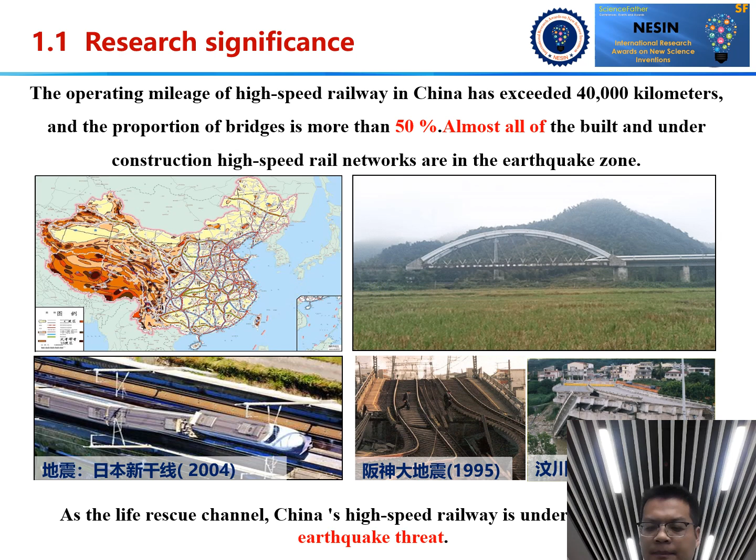Research needed: last year in China, many earthquakes happened, for example Qinghai, Menyuan, Sichuan, Luding, and so on.

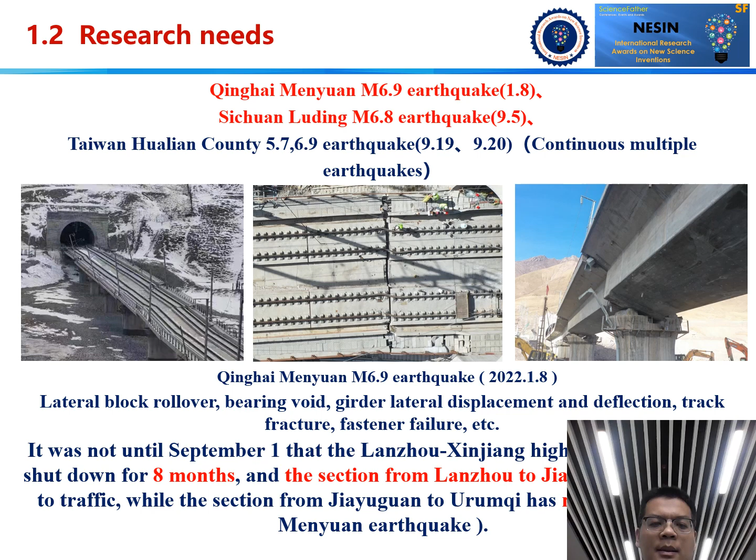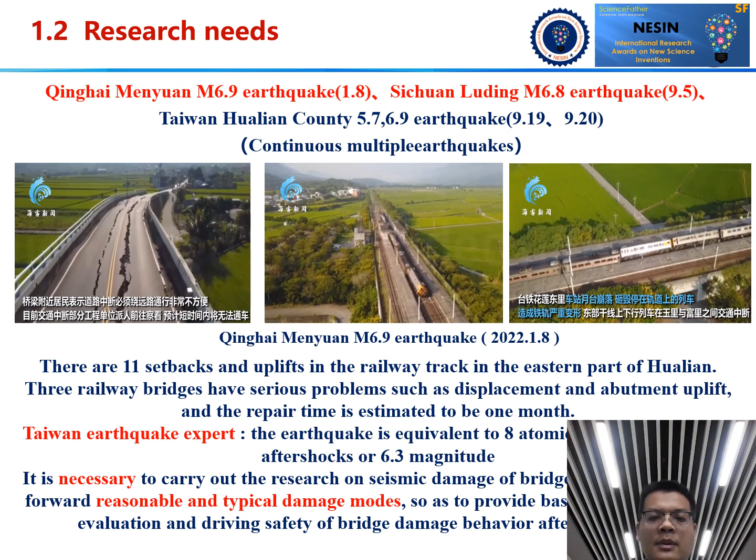These three pictures show the bridge, the track or rail, or the tunnel. Both of these key members on the high-speed railway line are damaged under the earthquake. This picture also shows the earthquake damage.

Scientific problem: from the earthquake damage shown in the PPT, you can see there are some scientific problems to calculate or solve. The first one is the mapping relationship between the damage degree of key components and track irregularity under earthquake.

It is the link between the degree of seismic-induced damage of the track-bridge system and the safety of driving on the bridge. So we can think about how to reveal the damage mechanism and energy dissipation mechanism of key components.

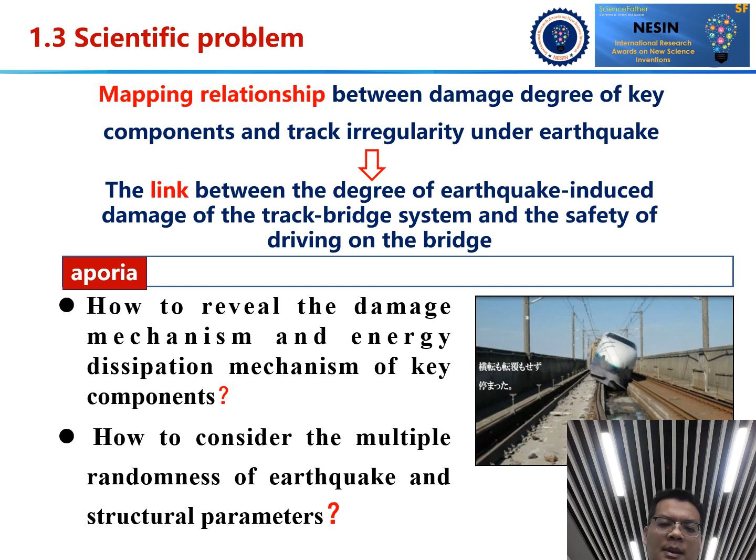We can see the bearing, the pier, the track, the fastener, the CA mortar. All of these components we can call the key components in the high-speed railway system. Next, how to consider the multiple randomness of earthquakes and structural parameters.

Next is the corresponding relationship between traffic safety on the bridge of the track bridge system and the seismic damage limit of the components. This covers seismic design of components of the track bridge system, how to determine the limit state of driving safety on bridges after earthquake damage, and how to evaluate the applicability of driving on bridges with earthquake damage. This lays a foundation for research and development of seismic design and isolation technology based on driving safety.

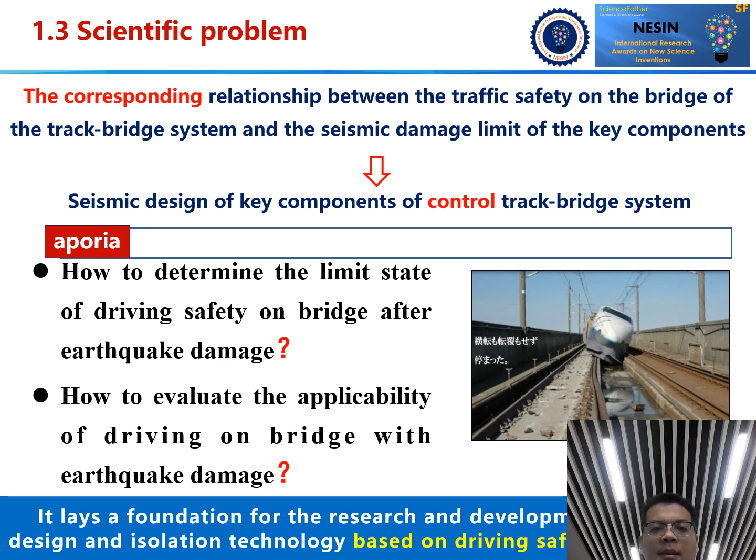Now let's look at the types of ballastless track slabs. In China we use three types of track slabs. We call type 2 the longitudinal track slab, and types 1 and 3 are unit track slabs, meaning they are composed of unit track slab sections. The length of one unit track slab is 5.6 to 6.5 meters.

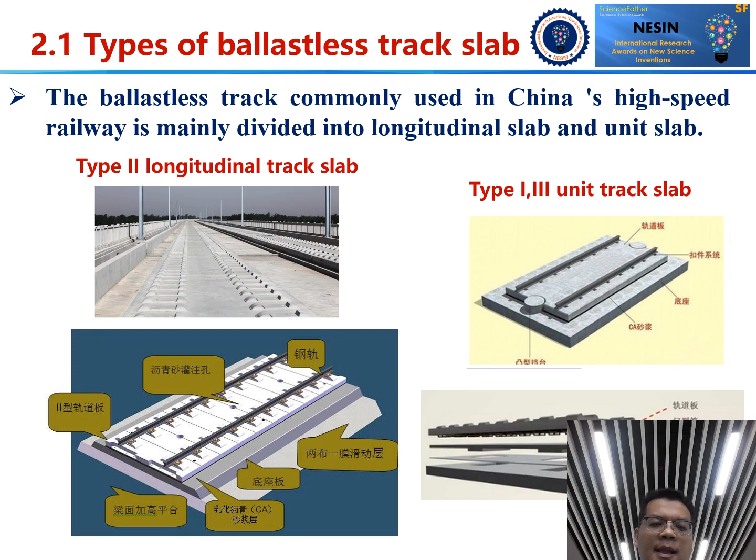In this track slab there are many key components, for example the rail, CA mortar, steel bar, base slab, track slab, and so on. These key components will suffer damage under earthquake conditions.

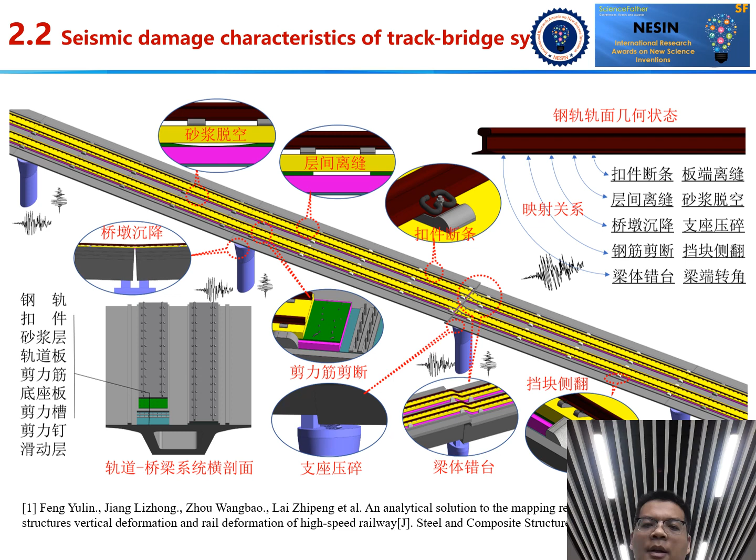All these seismic damages will be transferred from the bridge, through the track, up to the rail surface. This will cause the rail surface to become irregular. So we want to find a method to describe the damage on the surface of the rail.

We built a method for different types of track slab. This one shows bridge deformation, or we can say pier settlement. The pier has a settlement length, and we take these two beams to have the deformation.

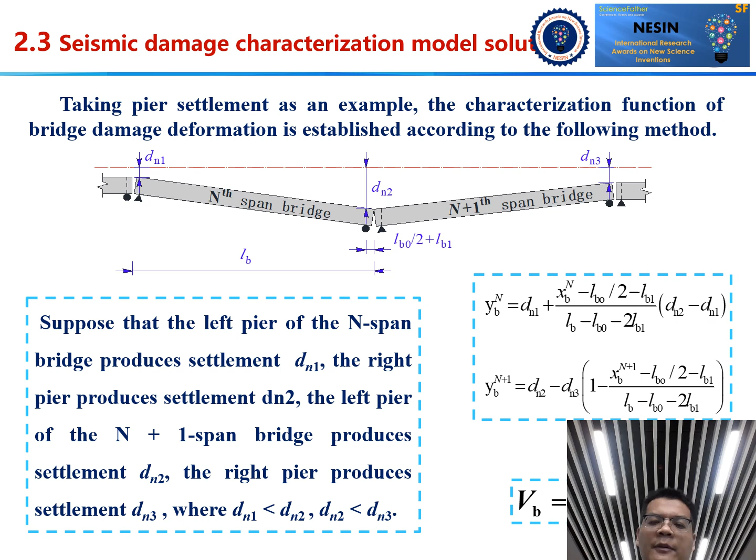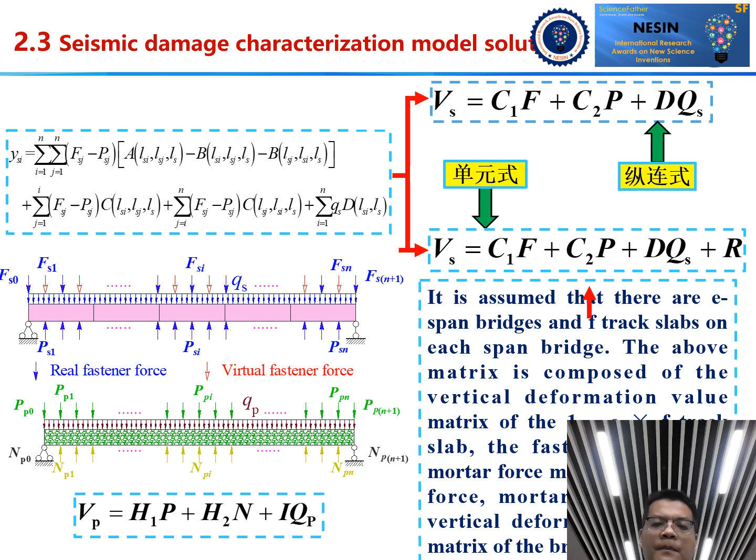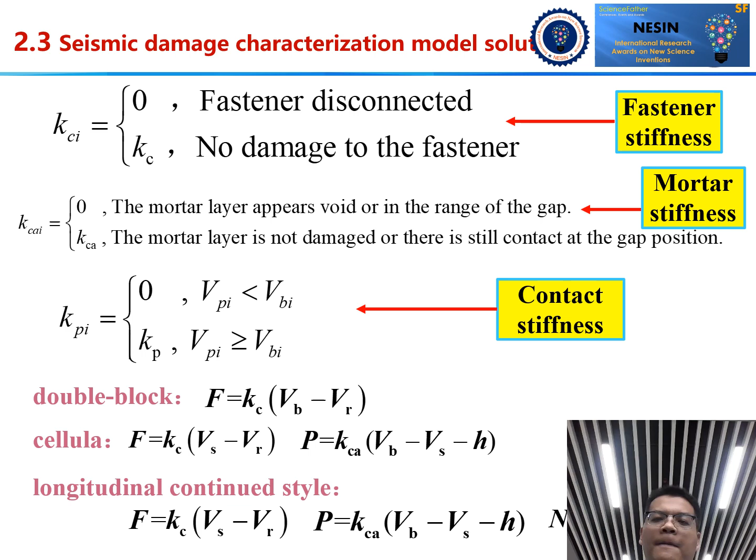If the fastener is broken, we can say this value equals 0, and if the mortar is broken, this value is also 0. If it's not broken, or broken to different degrees, we say KCI equals KC, where KC is the different damage stiffness.

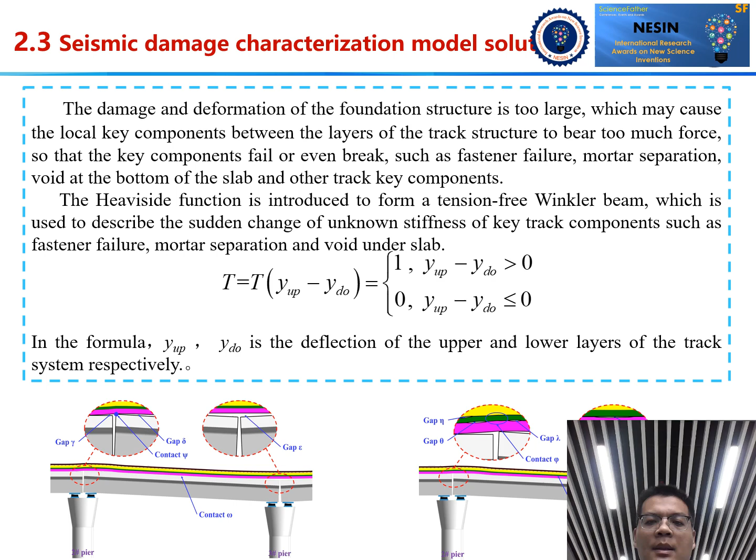Let us calculate using this method. When we calculate, we should verify the method, so we use four examples to verify it.

The former PPT verified the type 1 track slab; this one verifies the second track slab.

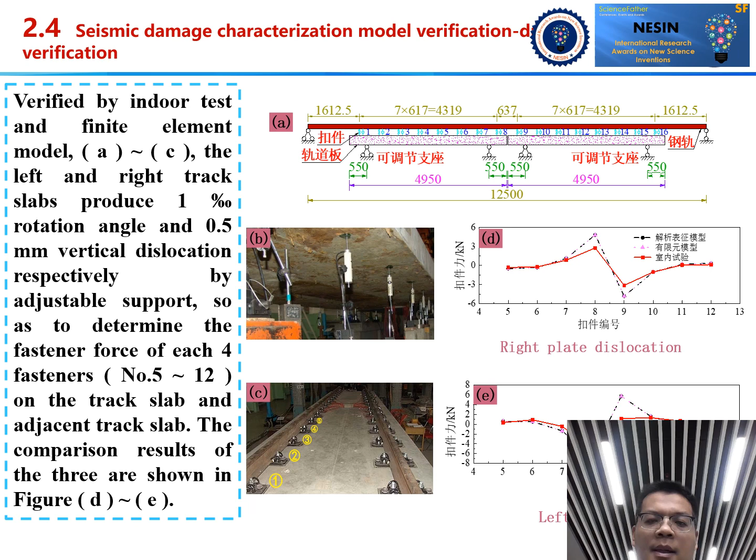We also use data from the field measurement method. We measured nearly 14 piers, and this is the deformation of the rail.

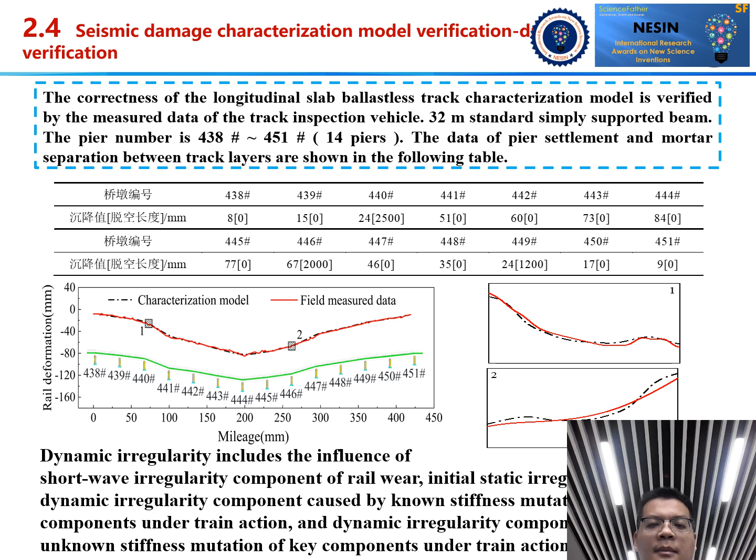The black line is our method's result, and the red line is the field measurement data. You can see the two results are the same, so our method is correct.

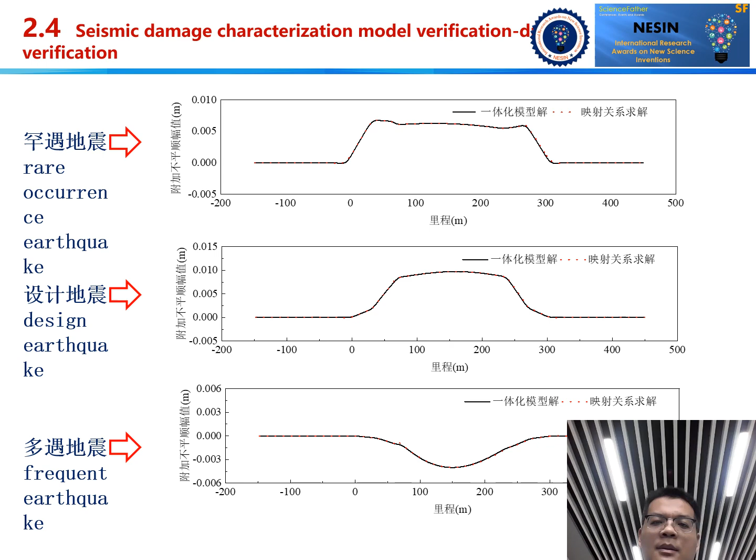We also used earthquake deformation data for verification, and we can see we also got the same result.

When we verify the deformation in different situations, we also need variation in the method applied to the train-track-bridge coupled system, the large system. We put the deformation calculated from our method together with the field measurement data.

We can get the dynamic result from the train, and you can see it is also the same.

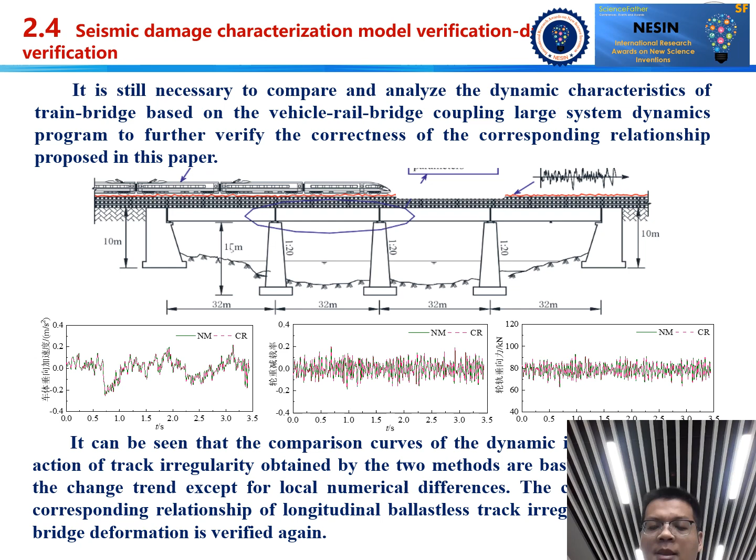So once we calculate with our method, we can use it for calculating or describing the seismic damage of the high-speed railway system. That's all, thank you.